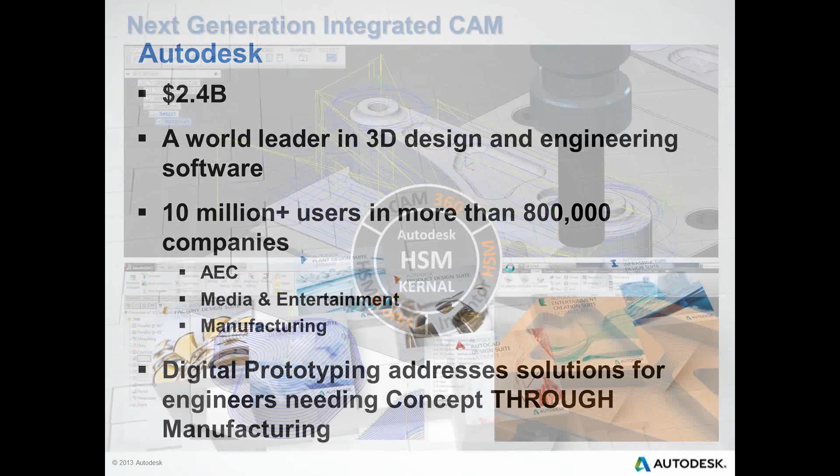So since Autodesk has purchased HSMWorks, they've been able to better HSMWorks and also add 2 more CAM solutions into their portfolio with Inventor HSM and CAM 360, which is the first cloud-based CAD/CAM solution.

So why Integrated CAM? With Integrated CAM, you're able to leverage your existing investment in CAD tools, but also add the ability to add CAM to those CAD tools. And because of this, the typical 8-step machining process, and of course the 16-step machining process where an ECO is involved, is greatly reduced when the CAD data is leveraged.

So by reducing the steps to updating CAD data, regenerating and validating toolpaths, and posting your code, it allows the NC programmer and design engineer to take control of the NC programming process. And many downstream benefits include ETO automation, streamlining of communications, true workgroup collaboration, ECO accuracy, and faster turnaround time.

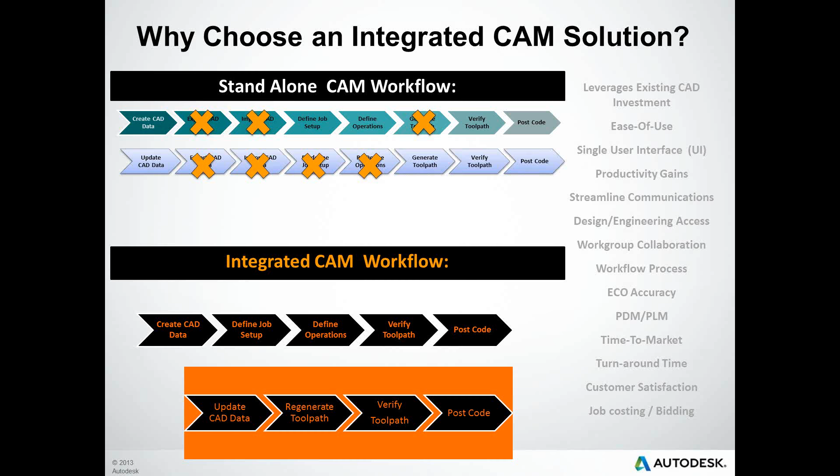And there are a lot of players in the integrated CAM space, and Autodesk focused on just one, HSMWorks. And this is because HSMWorks founders shared an innovative vision that Autodesk has. So when you consider major advancements in the CAM industry, you will find an HSMWorks founder behind them, including the birth of adaptive clearing, which became the basis on which HSM, high-speed machining, was built.

And a lot of first-to-market options, both technological advancements like distributed CAM and the first ever CAD/CAM cloud option, and business benefits such as a free post library, open API, and flexible purchasing options to meet the nuances of each type of company. So with that, there are 3 primary flavors of HSMWorks.

First, you have Express, which is our 2.5 axis milling option. You have Professional, which is Express plus your 3D milling, 3+2 and 4 axis, turning and mill turn, and then our Premium option, which is multi-axis milling.

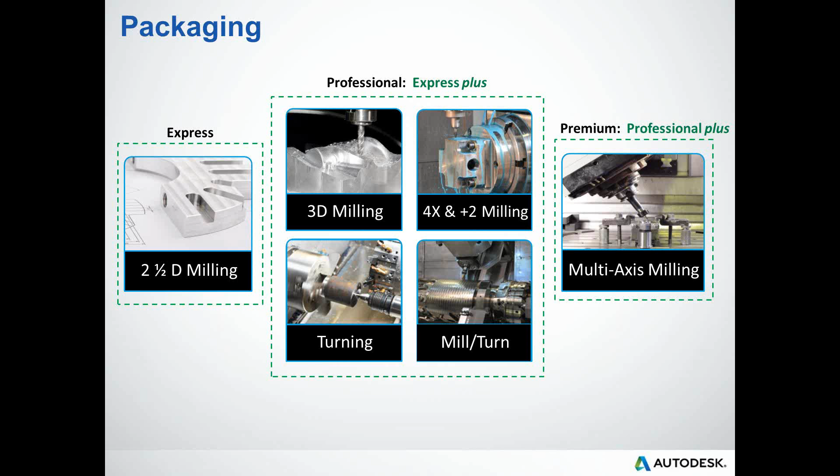So including an open API, access to more than 75 post-processors, adaptive clearing, and tool libraries, the product levels are not modularized. They also allow you to leverage integrated CAM regardless of your budget and machining needs. And in the case of our Express and Professional versions, you will need to have your own seat of SolidWorks. So as you can see, there are lots of features that are included in these options.

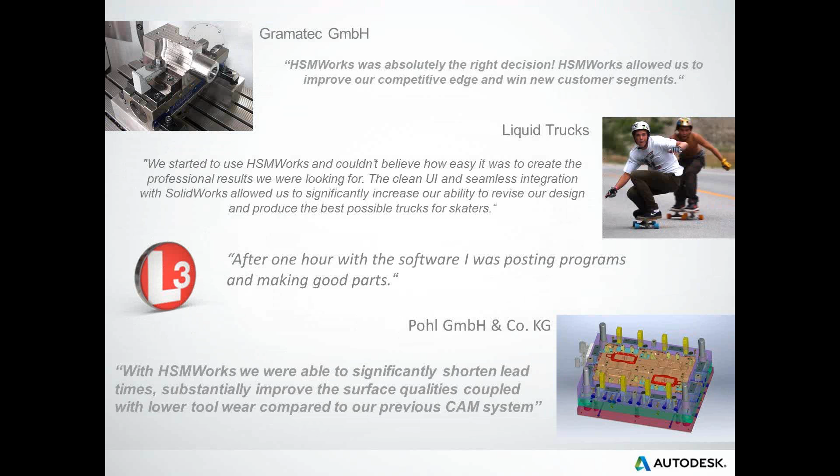So here are a couple examples of companies around the world that have integrated their CAM with HSMWorks. So now with that, let's go ahead and go into our demo side of the presentation. So first off, I want to start off with just showing our 2.5 axis, and just show you how easy it is to get a program done.

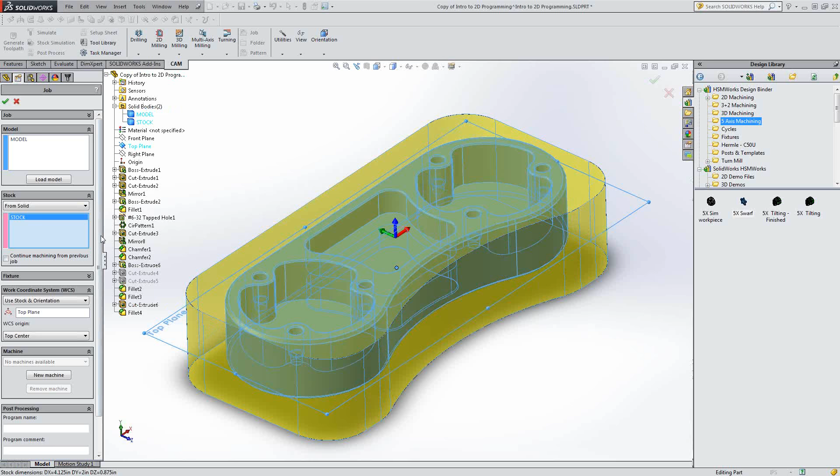So first what I want to do is I'm going to create my job setup. So notice it automatically finds my model. And then here I have the ability to select how I want to define my stock. So we have 5 options. For this one, there's a second solid body in my part that I want to define as my stock. So with that, I can go ahead and OK, and now I can start milling this part.

So first, I'm going to start off with a face toolpath. I go to my tool library, pick my face end mill, and here I have to hit OK. That's all I do, and it finds the part that it needs to mill and knows what it needs to take off, and it defines the toolpath.

So next, I want to go ahead and start roughing out these pockets. So I'm going to go to my 2D adaptive clearing. Again, go into my tool library and pick my 1/4 inch flat end mill. And then here, I'm going to pick the bottom face of my pockets.

And if I wanted to, I can go to my passes tab and tell it how I want to do my stock to leave. I'm going to leave that as it is. And here I'm going to hit OK.

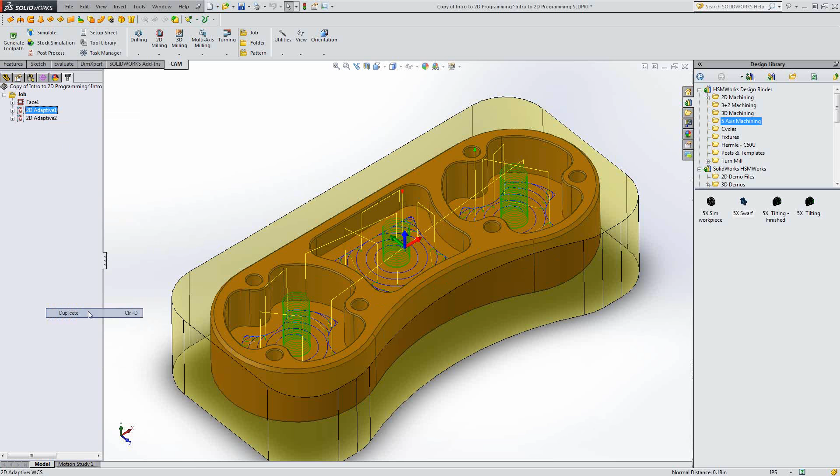So now I've got my pockets roughed out. And now I want to rough out the outside of my part. So I can right-click on my 2D adaptive, and I can click Duplicate. And if I go in and edit this, in my Geometry tab, I can clear the selection from the previous operation. And now I can define my selection for this operation.

Now, one thing I want to note is this checkbox down here for machine cavities. I'm going to turn that off so that it knows it's going to be milling between the stock perimeter and this part, or in this contour. So again, hit OK. And now I've got the outside of my part roughed out.

So now let's say I want to go in and start doing finishing passes on this and on the outside. Again, I can right-click on my 2D adaptive for the pocket, and I can go to create derived operation, and then to 2D milling and 2D pocket. So with this, it's got all the same settings as was done in the first adaptive clearing operation. So here, all I need to do is turn off stock to leave.

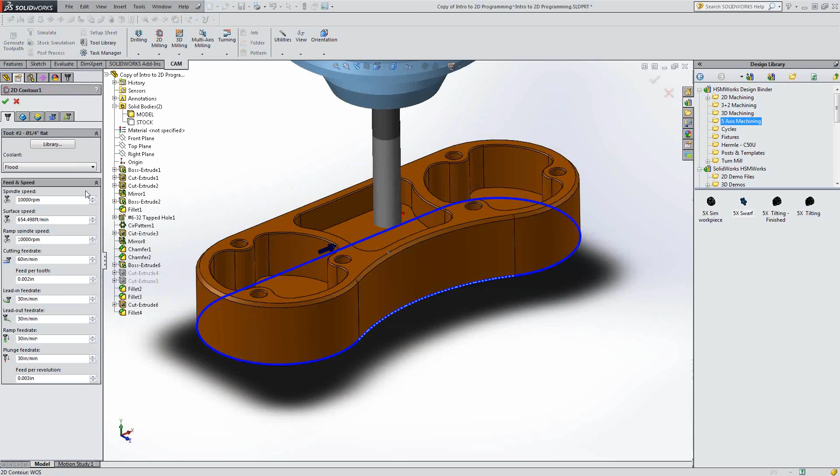And again, I can do the same steps to finishing the outside of my part with 2D contour. And here, the stock to leave needs to be turned off as well. So now we've got roughed and finished pockets and outside of part. So what we want to do next is chamfer the outside and then each of these pockets. So with that, I'm going to do a 2D milling operation, 2D contour.

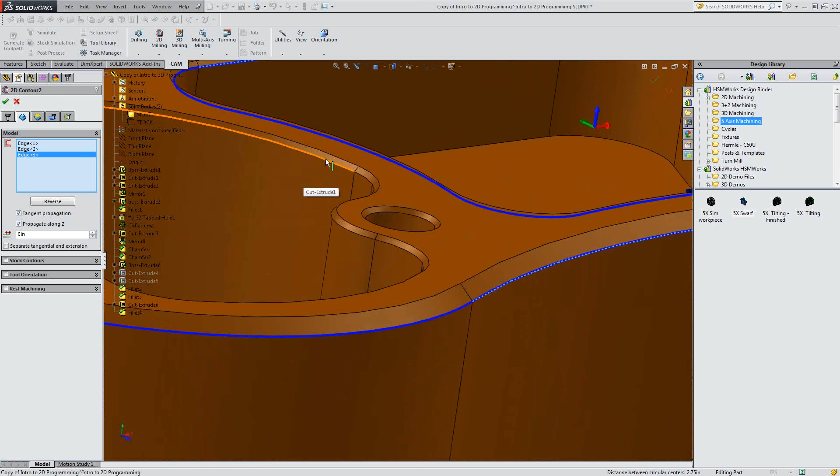Again, I'm going to go into my tool library, and I'm going to pick my chamfer tool. So here I can pick that contour, that contour, there and there. So now, one thing I want to show you is on my passes tab, now that I've picked an actual chamfer bit, you'll notice I have an option here for settings in my chamfer operation.

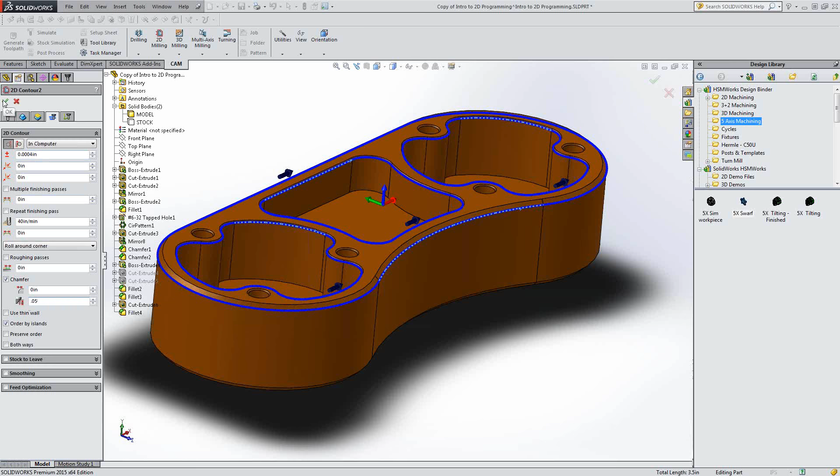So one thing you want to know is with HSMWorks, they built this to where it doesn't clutter your user interface. It only shows the options that you need for the operations and tools that you're using. So here I want to set a 0.05 offset down in the tool bit so that I make sure that the cutting surface is completely touching the part. Okay.

So we've got that, and now I just want to do a simulation, so we can see basically where we're at. So one thing you want to notice in these simulations is not only does it give you toolpath information on XYZ movements, you also get operation information, telling you what operation it is and the tool I'm using. And then it's also giving you machining time.

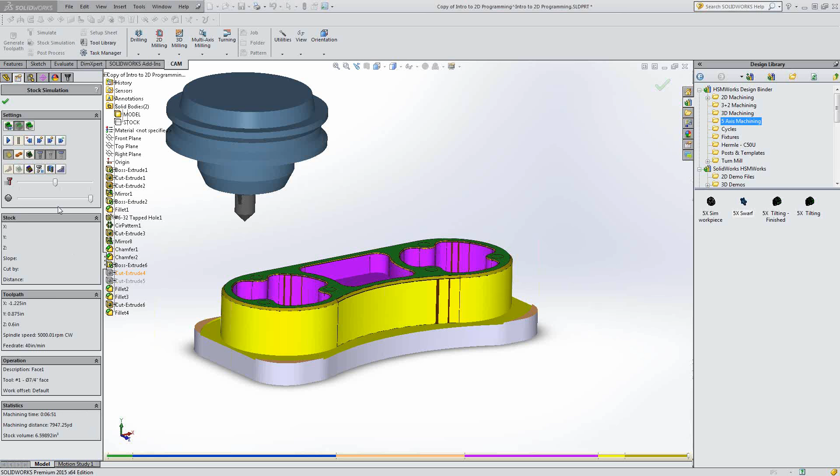So we know that we've got the part roughed, and the last thing we've got to do is our holes. And here we need to do a pre-drill with our tap. So the first thing I'm going to do is go to my drilling operation, and I want to do a spot drill. So I've got my chamfer bit selected already from the last operation. I'm going to keep my chamfer.

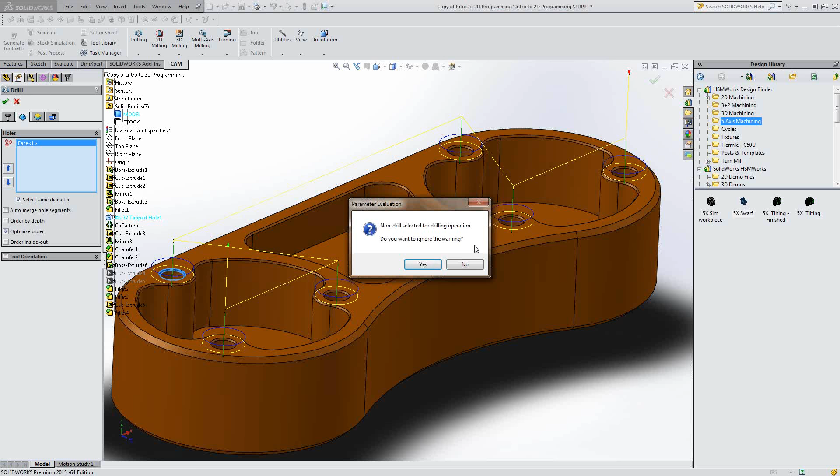And all I need to do is click on the conical face, and then come over to my browser and select same diameter. So you notice now that it's found all those holes, so I didn't have to go and select them all. And then it's giving me a warning saying that a non-drill bit has been selected for a drilling operation, but we all know you can use a chamfer bit for a spot drill. So we're just going to go ahead and say yes and ignore that.

So now I'm going to go back in, and I'm going to do my drill. I'm going to tilt it down to where I can see the smaller diameter. Again, here I want to select same diameter and auto merge. And the auto merge basically tells it, hey, there's more geometry above, so you need to make sure you compensate for that. So now I've got that. And then lastly, I'm going to do my tap.

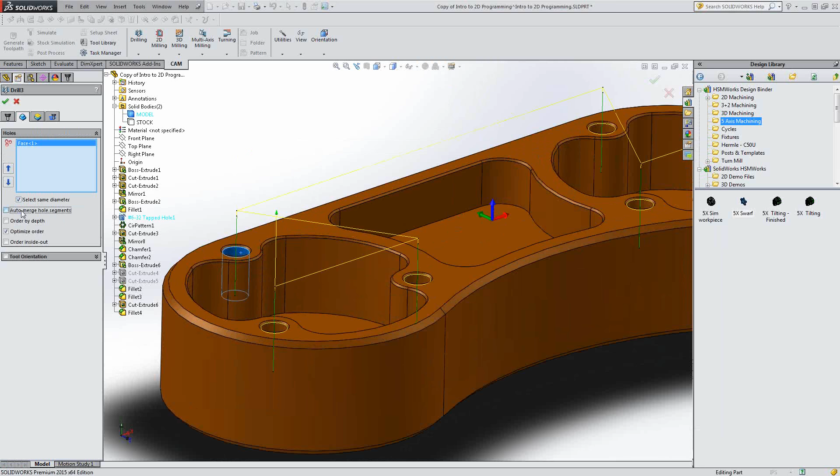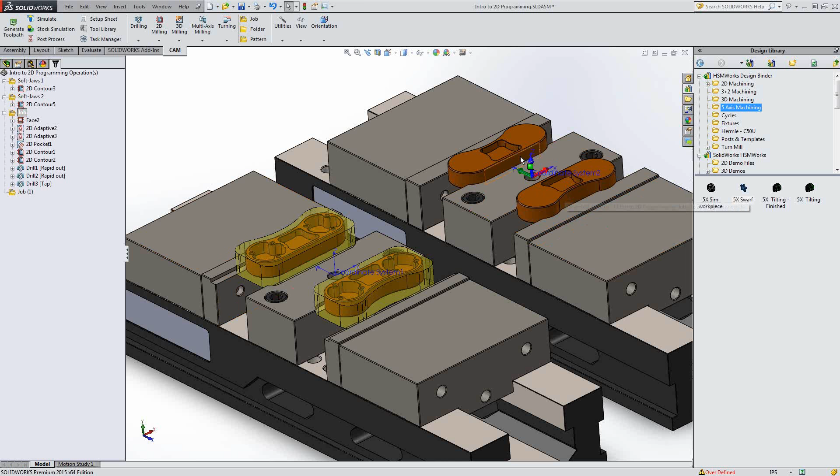Again, I select same diameter and auto merge just to make sure. Okay, so with that, we've got a programmed 2.5 axis part. Now, let's say this isn't just an individual part, you're doing this in assembly. Okay, so I've got two fixtures, two of these parts, and then the same part flipped over so that you can mill the bottom.

So I've got this first part already programmed. Now one thing I want to do is I need to recreate all these toolpaths over on this part. But I don't want to go and just have to redo everything. So I'm going to select all my toolpaths, and I'm going to say make pattern. Now one of the great things that I like about HSMWorks is if you have multiple parts of the same part, we have component pattern.

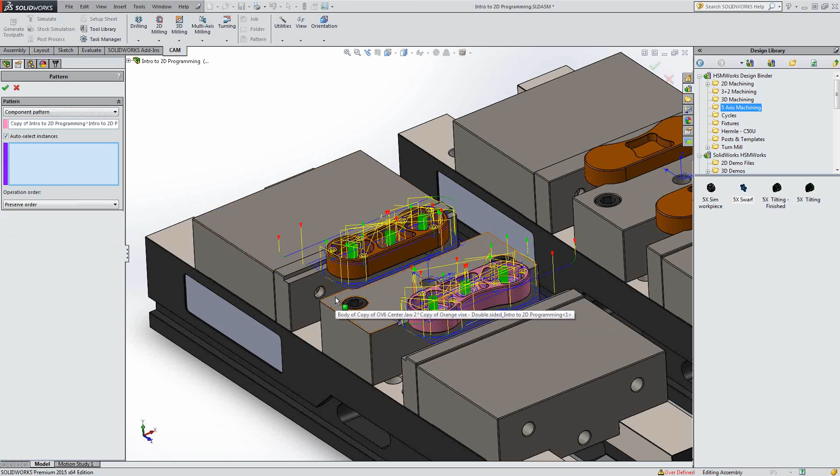So all I have to do is pick my components, and it automatically finds the part. And then it doesn't matter where that thing is. I can do a drag and create multiple copies. Anyway, and it'll find that part no matter where you put it.

So now let's say I've got my job set up for this part, and I want to use some of these toolpaths that are on this job setup above. So let's take this face operation first. I can right-click on it, and I want to copy it, and I want to paste it into this folder for this setup over here. So now all I have to do is hit Generate Toolpath, and it'll automatically find and set it on that new geometry.

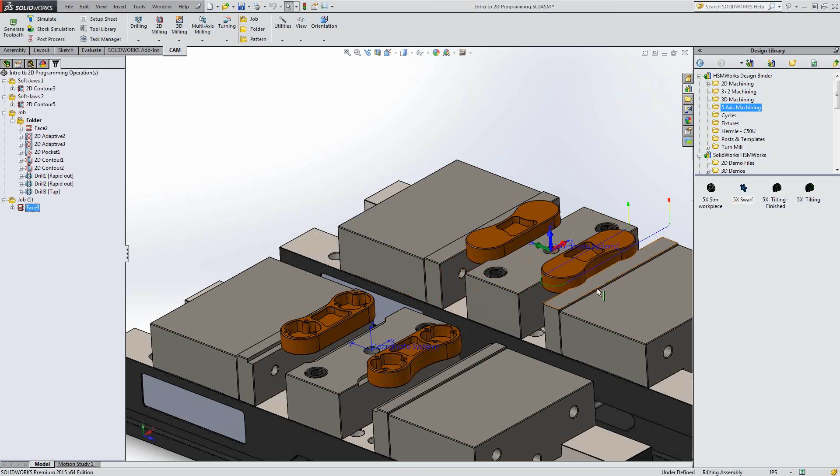But now, I've got this 2D adaptive operation for these pockets. I want to use the same operation with tools, settings, everything, and I don't want to have to go recreate it or copy and paste. One of the things that is awesome in HSMWorks, I can click a face, and I just drag and drop. If I had the right folder set up. Let's try that again. Drag and drop. And there you go. And so I can do the same thing with the pocket operation.

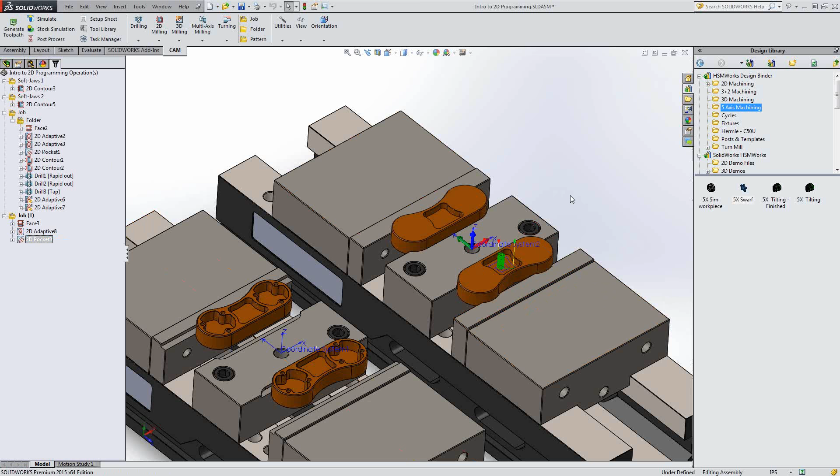So there's some pretty awesome ways of copying and pasting toolpaths and patterning components. So next, I want to go ahead and go into our 3-axis part of the demonstration. So before in our 2.5 axis, we had to define some of the geometry and where it was going to lay at. But in our 3-axis, we don't have to do that.

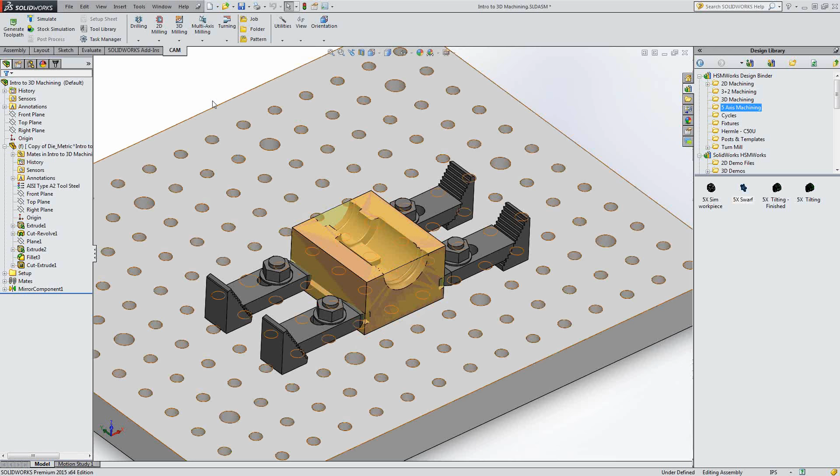So what I want to do is I'm going to come in, create my setup again. This time on my stock, I'm just going to say relative, and I don't want to have any additional stock. Okay, and then I'm just going to click OK on that. So I've already got my setup. So in my 3D milling tab, I want to go down to adaptive clearing. And my first operation, I'm going to do a 3/8" bull nose end mill to just rough out some of the material.

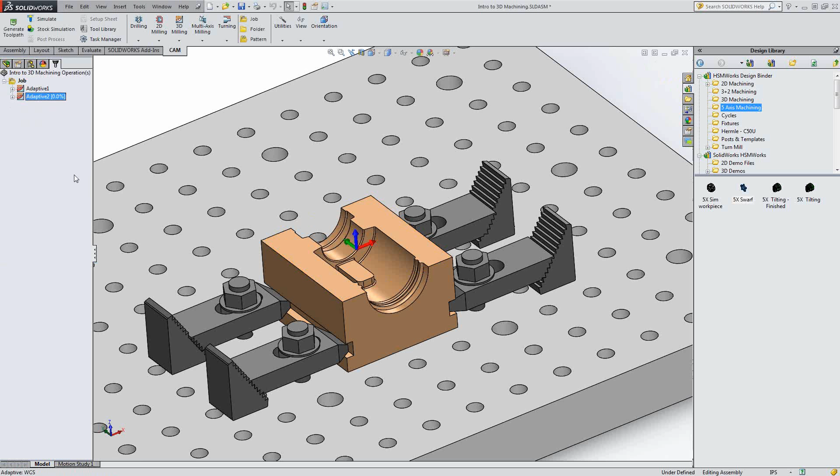So with that, I'm just going to click OK and let it go. So while that's going, I'm going to go ahead and start my other adaptive, and this will be another roughing step down from that one. So I'm going to go on my 3/16 bull nose, and in my geometry tab, I want to change my rest machining option to from previous operation so that it recognizes what's been removed in that initial adaptive that we did. And so notice while I created this adaptive operation, my first one finished doing its calculation.

So while that one's going, I'm going to finish off the top of this little flat face right down here. So I'm going to do my horizontal operation. I'm going to keep the same tool. And then I want to go ahead and OK and see what I get. So while I was doing the horizontal, again, my second adaptive clearing finished.

So with this horizontal now, it found not only the face at the bottom where I'm wanting to go, but it also found these two faces at the top, which obviously I don't want because it's already finished. So let's go ahead and hit edit. I'll go into my height tab, and I'm going to change my top height to be just below that so it doesn't recognize it. And so now that's finished. So we've got this roughed out. This face is finished. Let's go ahead and simulate this a little bit and see what we get.

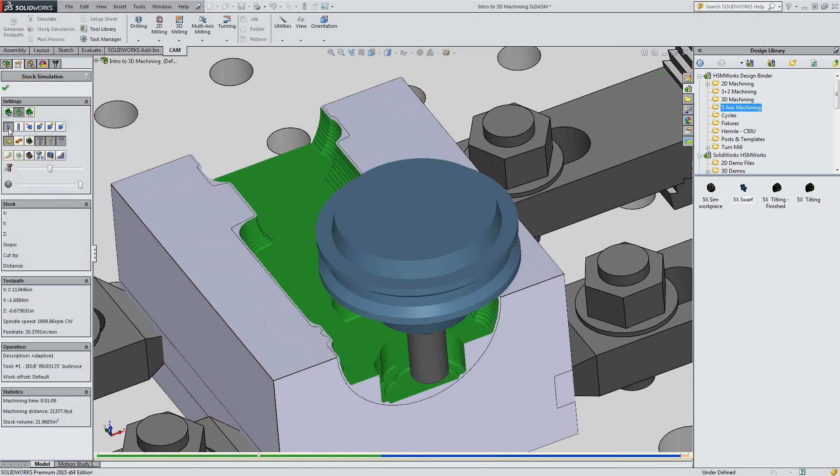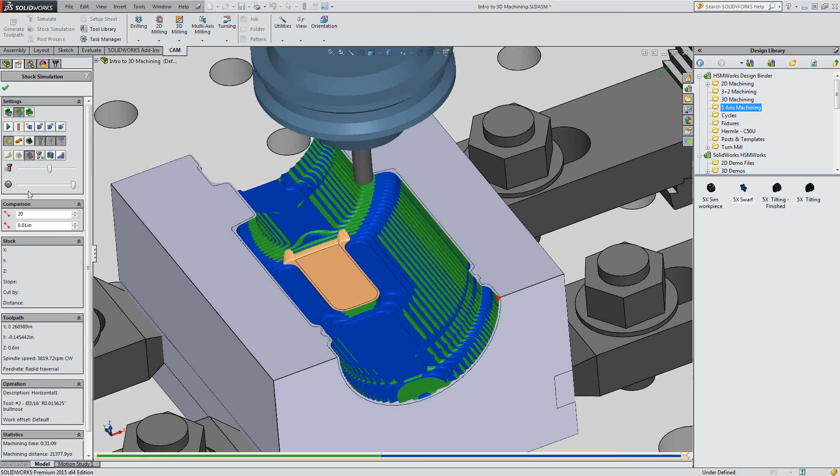So again, down here you can see in the statistics, it's estimating my machining time to be 31 minutes. All right. Now, another great feature to show in the simulation is comparing stock to the model. So you can see we've got quite a bit of material that we still need to remove to be able to have a finished part. So let's go ahead and start doing that.

So in my 3D milling, I'm going to go into my parallel command. And for this one, I'm going to go down to a 1/4" ball nose end mill. Now, if I go into my geometry tab, here I want to do a slope containment of my toolpath. So I want to do 0 to 35 degrees. And then I'm going to go ahead and hit OK on that.

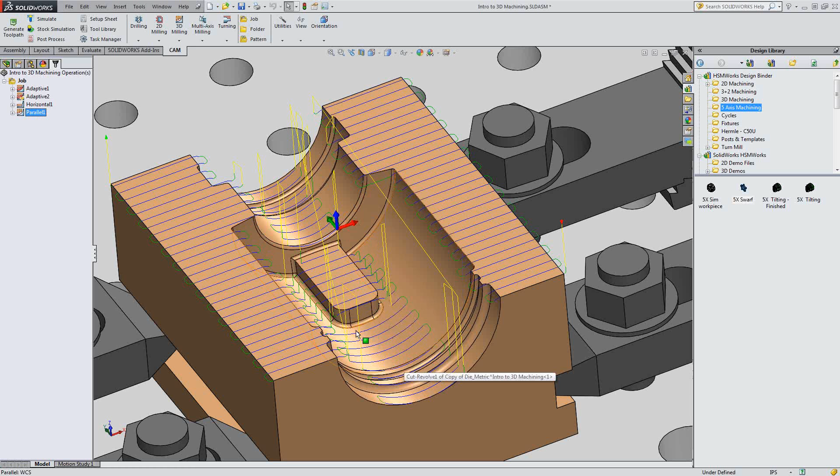Okay, so now notice, again, it got the top face on both sides and the top face of this. And I really want to refine my step over, and I want to change my path direction. So let's go ahead and go back in here. So again, in my geometry tab, I want to make it to where it avoids these two top surfaces and then this surface as well. So I'm going to turn on my check surfaces, and I'm going to select those three faces.

Now, for the step overs, I'm going to go into my passes tab. I'm going to change this to 0.02. And then for my pass angle, I'm going to go to a 45-degree angle. So now you'll notice I've got a really fine step over now. It's angled at 45, and it's contained in that 0 to 35-degree angle. So now let's go ahead and get the rest of it up.

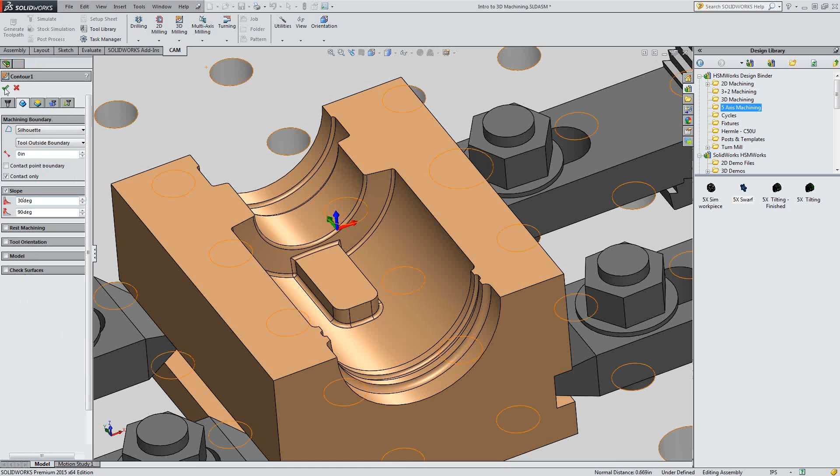For that, I'm going to do a contour. And on my slope, I'm going to make a 30-degree slope to 90 degrees because I want to have that 5-degree overlap to make sure that I get all the material. And then I'm just going to go ahead and hit OK. Alright, so now you'll notice not only did it get the inside, but it also got the outside. And we don't want that.

So let's go back into that. And on my machine boundary, change tool outside to tool center. And go ahead and hit OK. So now it looks like the toolpath that I want for that. So let's go ahead and simulate this again on the stock simulate. And I'm going to go ahead and speed it up so we can get that comparison window to see what we've got left.

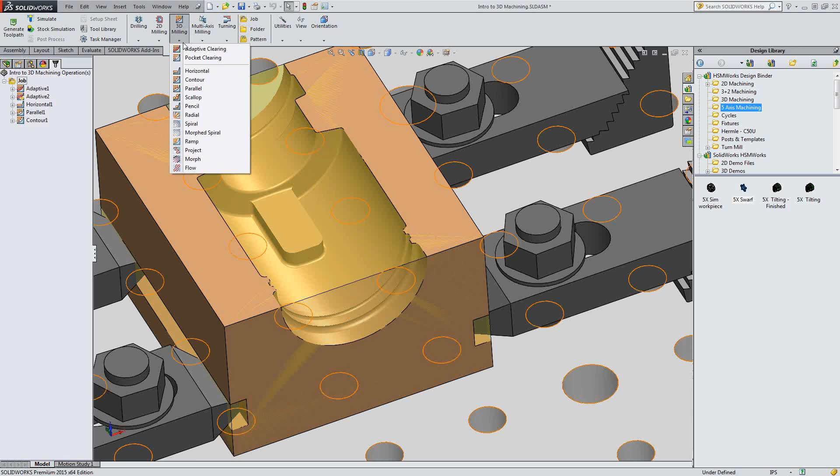Alright, so simulation's done. Now let's go ahead and turn on compare. So now you'll notice what I've got left is material in these radiuses. And that's about it. So let's go ahead and do one more toolpath and see if we can finish that off. So in my 3D milling panel, I'm going to go down to pencil toolpath. Now for this one, I'm going to do a 1/16" ball nose end mill. And I'm going to click OK.

Alright, so you'll notice it got these smaller radiuses and then this radius down here, but it didn't pick up these larger radiuses. So let's go back into the toolpath. And over in my passes tab, I'm going to change my overlap thickness to 0.125 so it'll find the larger radiuses. I'm going to change my step over number to 4 so that I can limit the number of step overs it takes. And then I'm going to do 0.02. I'm going to click OK.

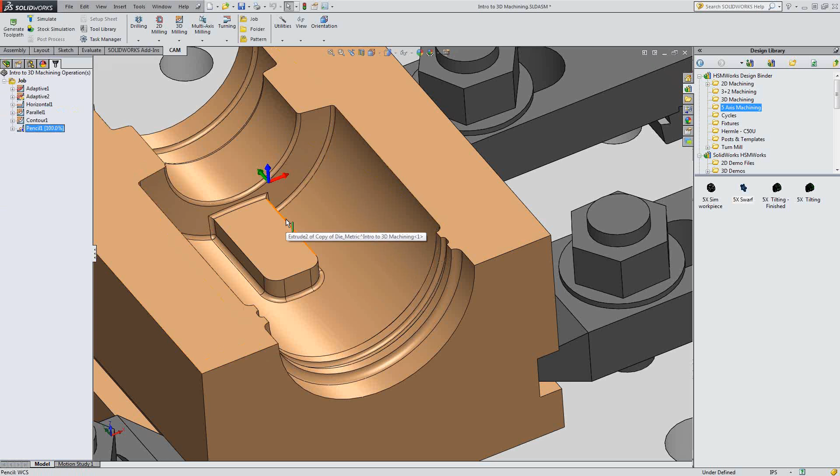And now you'll notice it picked up all these larger radiuses. And now, if we do a stock simulation, you'll notice that each toolpath is also color-coded as well, which corresponds to the bar at the bottom showing you where each step is.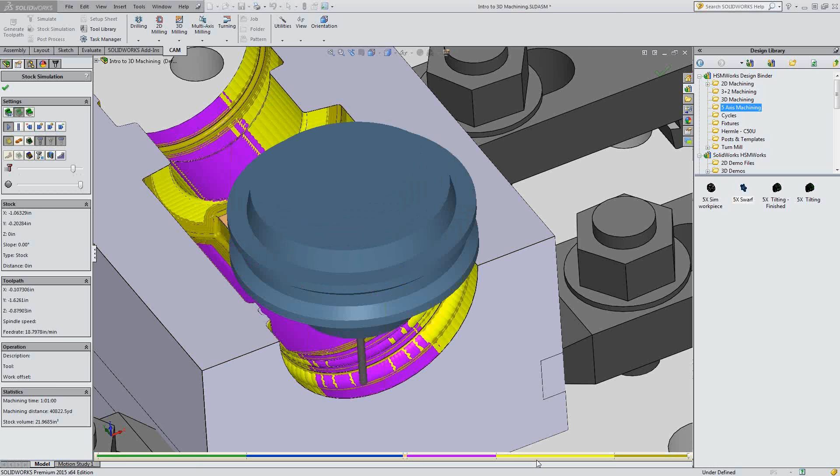Alright, so now we can do a comparison between the model and the stock. It looks like we have a good, complete part. So that's 3-axis. Next, I want to go into a little bit of 3+2 just to kind of show you what exactly you can do.

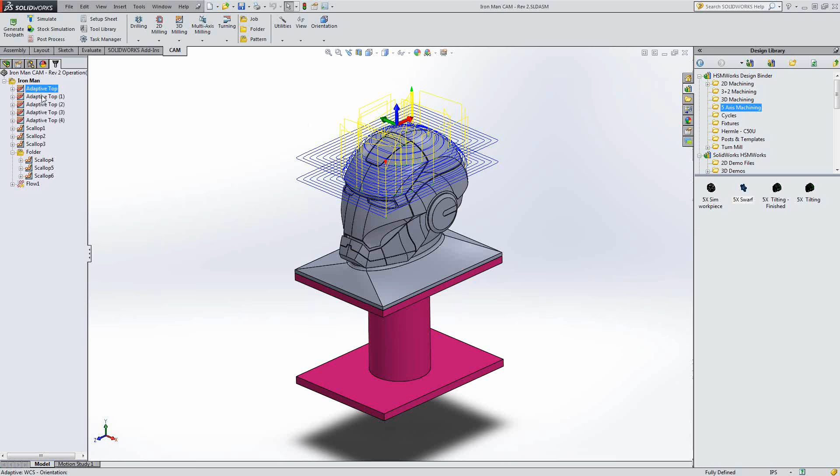So you'll notice that all these toolpaths, this whole part was programmed with my 3D milling toolpath. So let's show this one. So one thing you can do is you define your tool orientation. And then here I defined how far down I wanted that tool to go so that I knew that my tool would be able to go down without any collision between the shaft of the tool or the holder on the part.

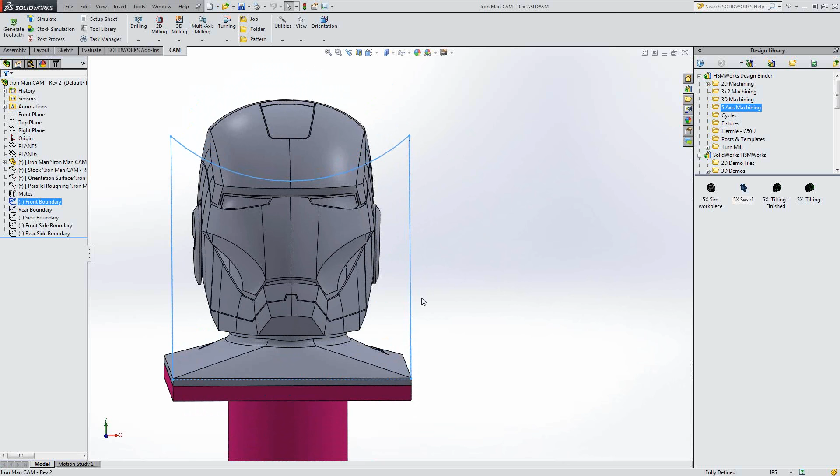And then also, a lot of these were done with, let's do this one, with creating a sketch. So by creating a sketch, I'm defining the boundary in which I want my tool to go so that it stays within that boundary at the plane depth that I set in my toolpath. So this is a good, easy way to be able to machine parts that you think would be a simultaneous 5-axis on a 3+2 and be able to have a complete finished part that looks really good.

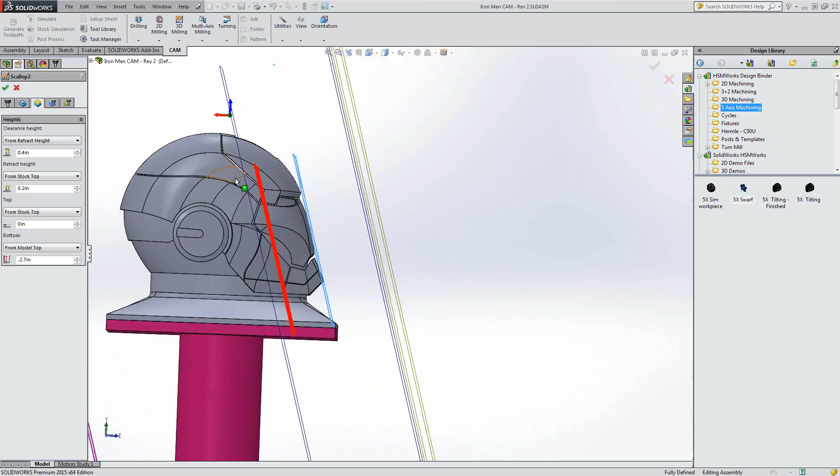So here's an example of where I use that sketch boundary and then modify depth in which I wanted my tool to go. And then that flow was just being able to finish that part. So I want to do a simulation of this real quick so you can kind of see the tool in motion and how it changes the orientation.

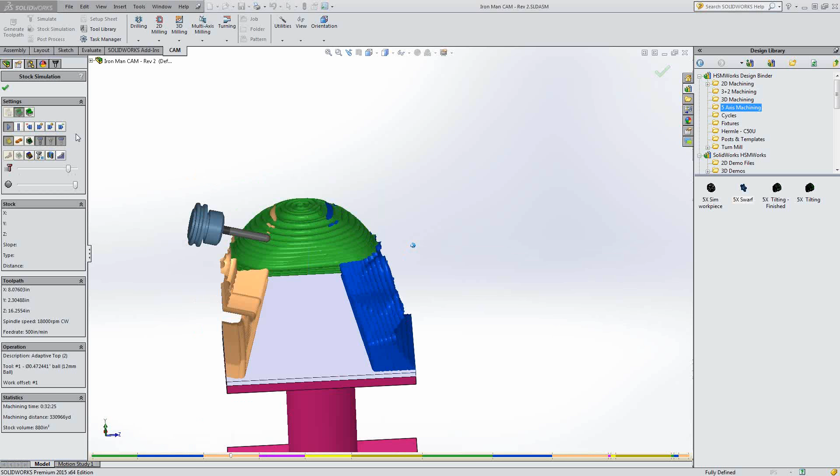So there I have, that's my first pass with the adaptive. Here's the second pass on the adaptive. Basically, I'm just roughing out the part. So now it's going to start going into the scallops and doing finishing passes. In a second, right here.

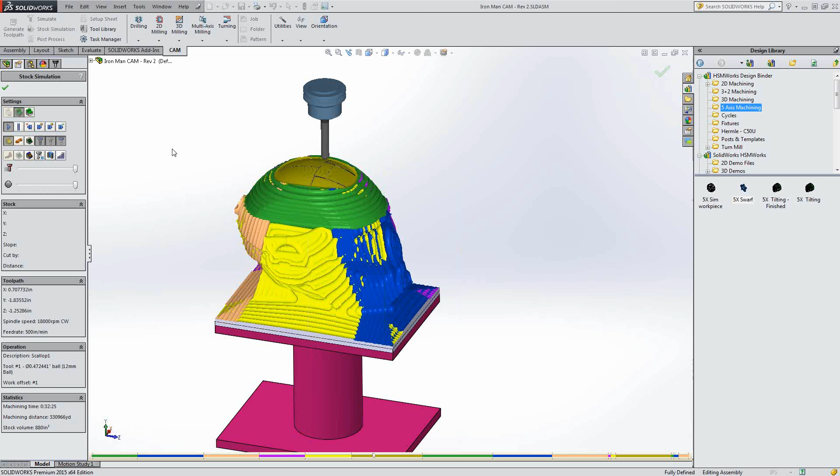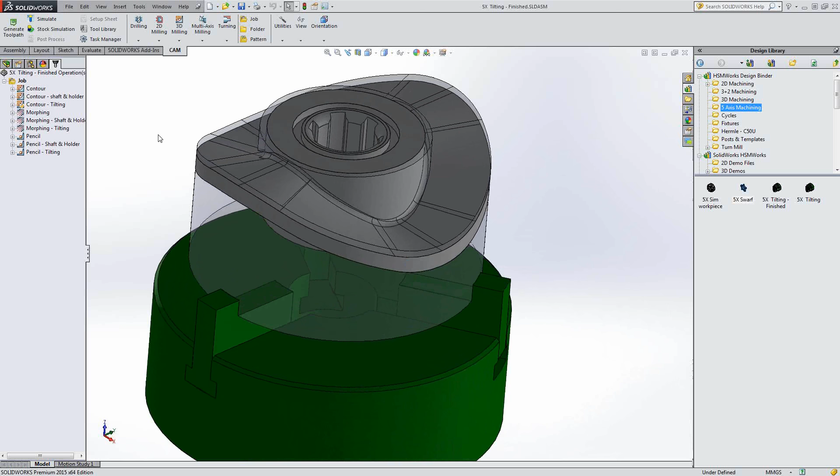So that's an example of how you can do 3+2 milling where a 5-axis simultaneous doesn't need to be completely used. Now I want to show, whenever you get into the 5-axis, the way HSMWorks has done it, they've added basically multi-axis tilting capabilities in the 3-axis tool options. So this would be a normal contour that we would do. You select the face of the geometry that you wanted to go around, and then that would be it.

But if I go in and simulate this in my stock, you'll notice over here that I'm getting clashes with the holder and the shaft. So to get by that, I can do what's in HSMWorks a shaft and holder detection, basically. And so with that, we've got multiple different options for how the toolpath would react whenever it detects a collision. So as you can see, I can either do a trimmed option, a pull away, detect tool length, or just fail the toolpath completely on collision.

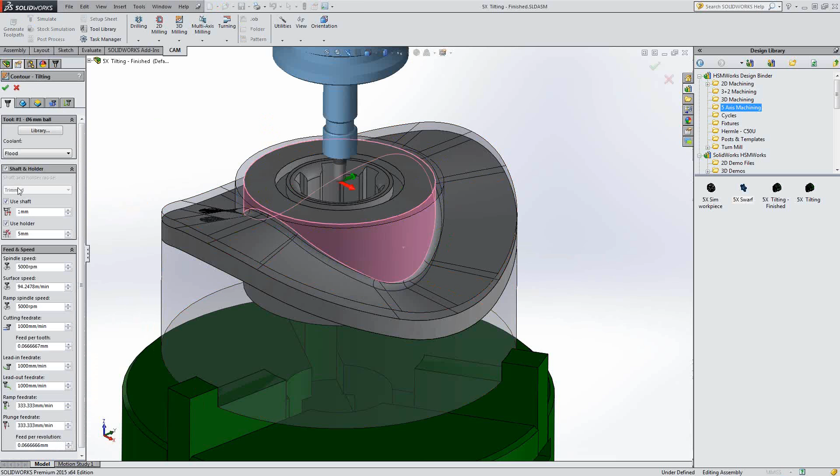So in this one, we did trim. And so what you'll see is that it literally stops the toolpath at the point that it detects that there's going to be a collision. But where does that leave me on machining the rest of my part? So what we can do is, I'm still having my shaft and holder detection, but if I go into my passes tab, I have the option to turn on multi-axis tilting. So I've got that turned on. I've got it set to an overall of 90 degrees to be able to move in, and 5 degrees front and back.

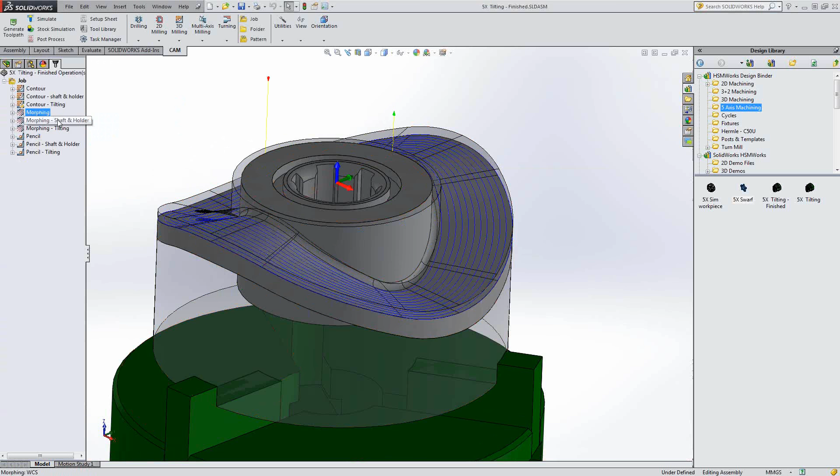So if I go ahead and simulate this, you'll notice as it goes around, it's tilting to make sure that the shaft and the holder stay away from the actual stock of the part. So again, here I can do that on this machining off this face. You know, this would be the option without the shaft and holder.

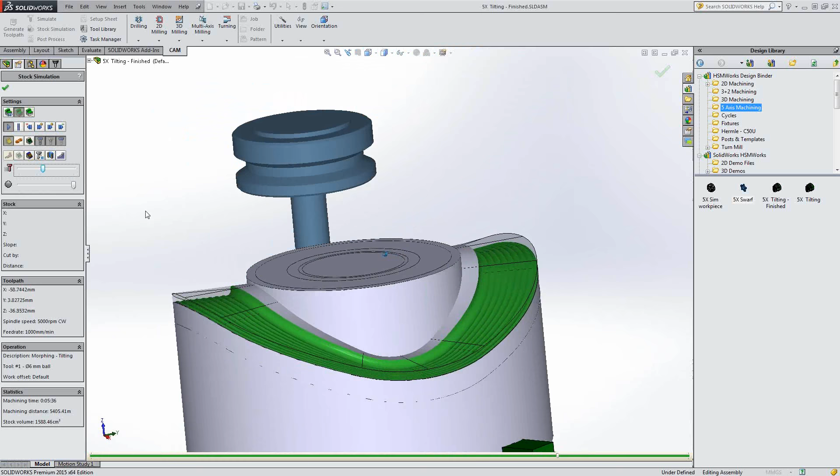So this would be with trimmed turned on. So it's pulling up, retracting to miss this part of this material, and then retracting over on this other side as well. And then here again, I've got my multi-axis tilting turned on. Again, in the passes tab. And so here I'm able to see that once it gets to that point, it will tilt. It will tilt if I have the right option turned on.

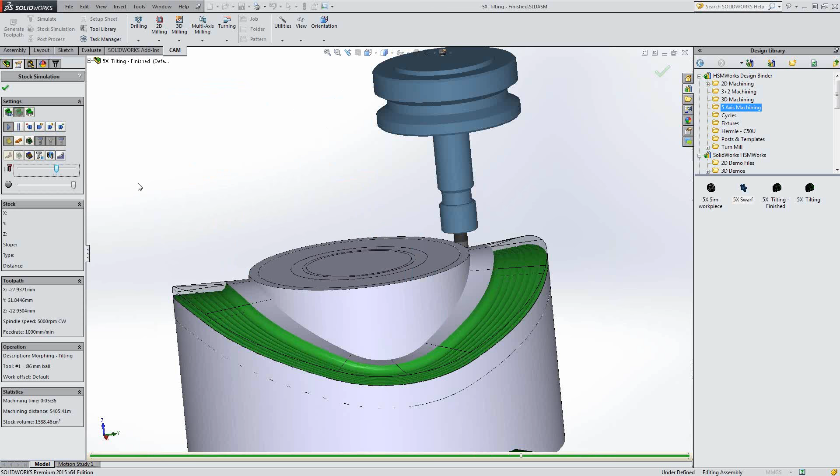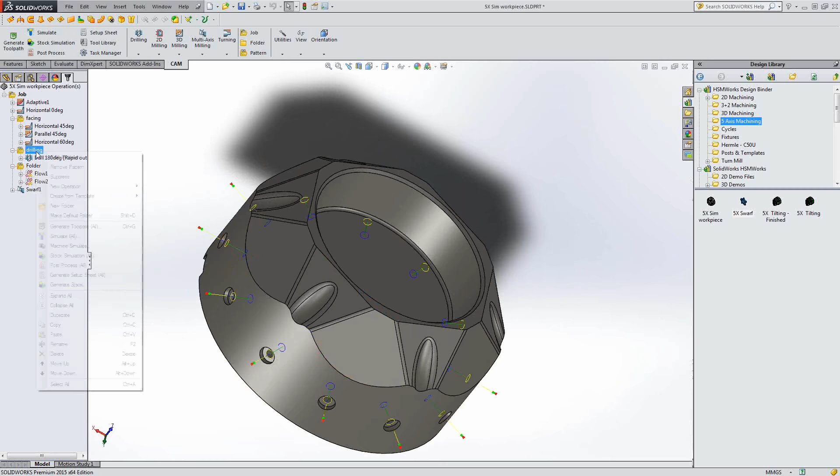Okay. And then the same can be done on the pencil operation. So with that, let's show a little bit of how you can do a simultaneous 5-axis operation. So again, this part is mostly programmed with our 3D milling options with the drill. And you'll notice that these are also circular patterns. So if I go in and edit this pattern, I've created the one operation where I've oriented the tool, which is this initial drilling operation. And then I've selected the circular pattern, picked the face, and then told it how many instances I want.

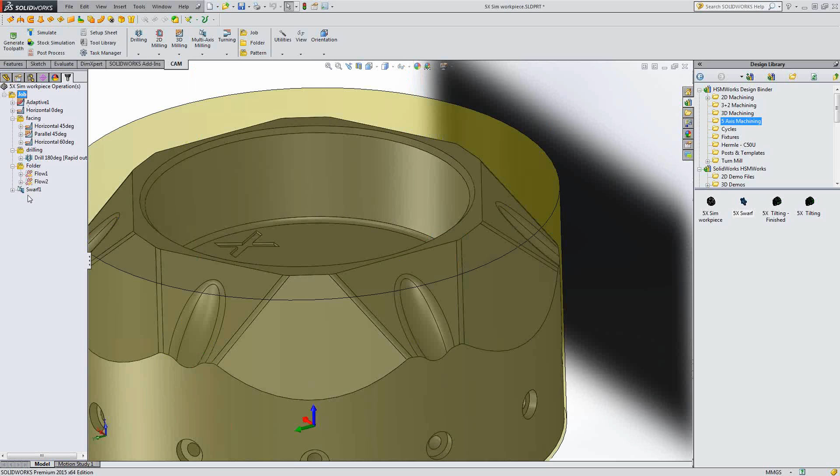So down here I've done the same thing. I've got this flow operation set up to finish off this contour, and then I've got the second flow operation to do a finishing pass on this contour. And then my swarf, which is a multi-axis milling option right here, is doing this angled contour right here. So then let's do a stock simulation on this.

One of the things I want to mention is that in your tool library, whenever you create tools or use other tools, you have the option to either have a tool holder on there - you'll notice the first tool didn't have a holder - or you can select one, or create your own when building your library. There are multiple ways to create tools: through the standard dialog boxes, or you can model your own and insert it as a form tool, which is handy when you have custom tooling.

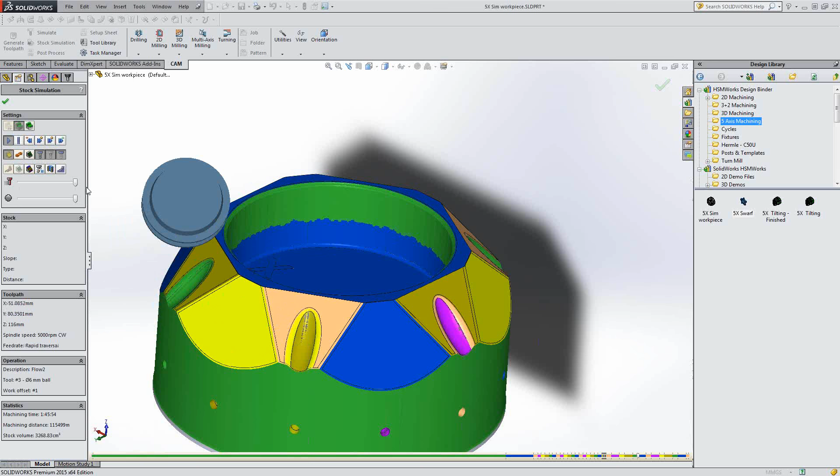And there again, you can do the same thing with the holders. You can use their standard ones and then basically copy the design and modify the geometry per what you need for your holders in your company.

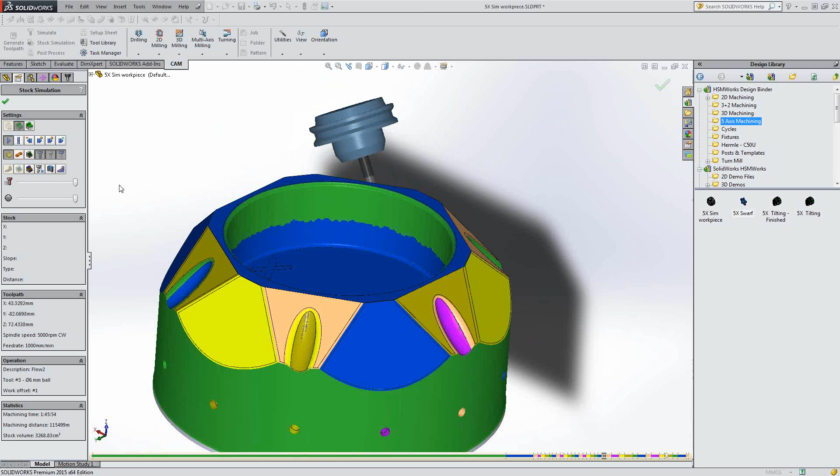Alright, almost done. So that's the 5-axis simultaneous show.

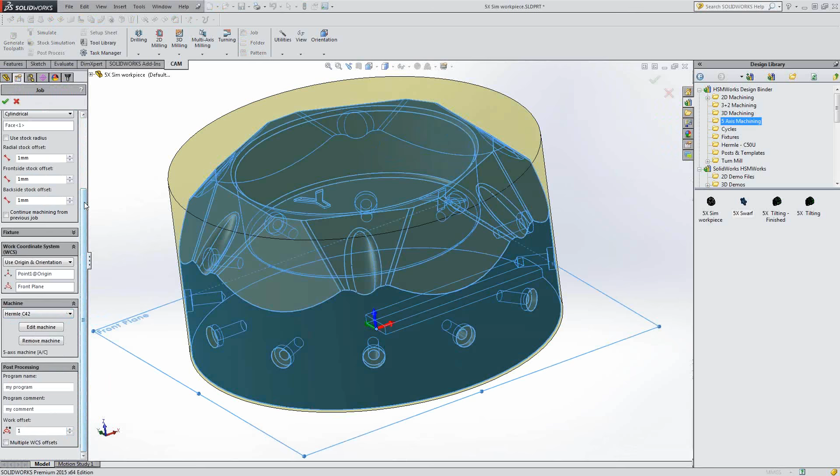One other thing you can do in here is machine simulations. So let's just say I want to go ahead and simulate that on a machine. I right-click on my job and go down to Machine Simulate.

Let's say I just want to hide some of the housing so I can make sure I've got everything right, so I can see how it's actually running. I'm going to go back in my CAM tab, simulate. Alright, let's go ahead and watch this.

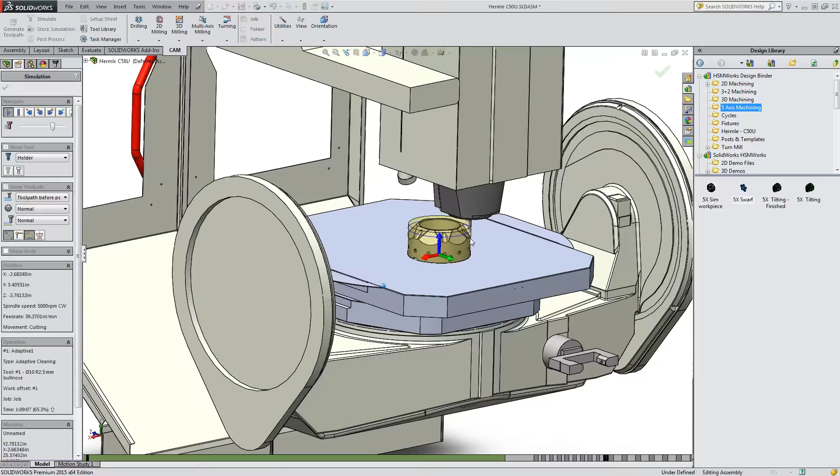It's pretty nice to be able to do machine simulations and watch the actual operation. Here you can actually see whether you're going to have some kind of collision in your toolpath. Plus it's just kind of fun to watch.

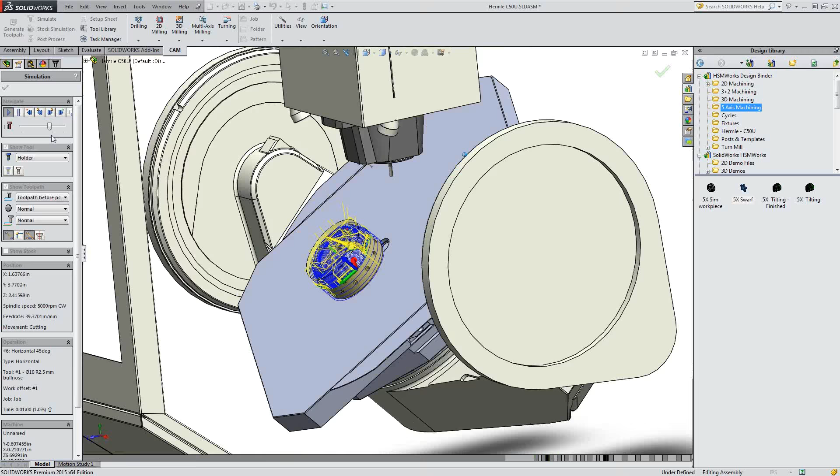Want to get into the tilting. Okay.

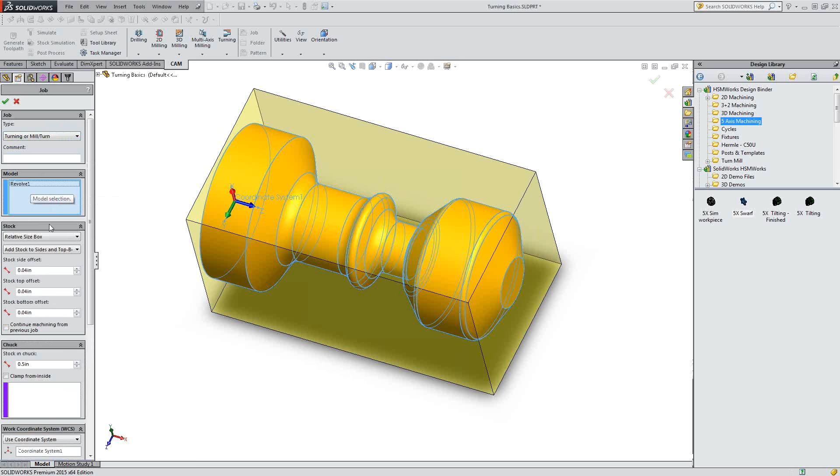Now I'm going to go ahead and go to the mill turn and turning aspect of it so you guys can see the basics of how it works in here. So I've got my part. Again, I'm going to create a job setup. Now the one difference between milling and the mill turn option is that I actually have to define a different job type. So again, my model's been selected.

I'm going to go to a cylindrical stock, and then I'm going to just pick a face so that it knows that's where it's going to be centered at. Now you'll notice it kind of has dashed lines representing the chuck. You can define and model your own chucks and then select it here. I know a lot of people do that as well.

So I'm just going to set up some of what my stock option is going to be. Change to 0.3. I'm going to do 0.1 on the front end, 0.1 regularly. Okay, I'm going to go ahead and click OK.

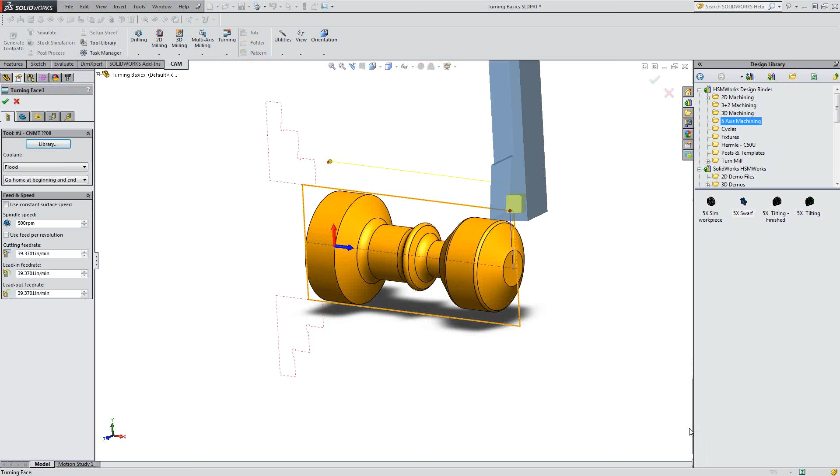Now, to start this, I'm going to do a turn-facing operation. Go into my tool library. I'm going to use this diamond tool. Then I'm going to go ahead and click OK.

Now you'll notice that the tool goes home before it goes into the part. Now you can change that right here on the front. I'm going to say don't go home. And then it's right there.

So next I'm going to go ahead and rough down the profile and use the same tool. And here I just want to go ahead and click OK, see what I get.

Alright, so you'll notice that with that operation, it's gone down at an angle. But say I didn't want to do that - I wanted to save that for whenever I do my profile grooving, and I just wanted it to come straight across. I can go into my toolpath, and in my Paths tab, I can turn off Allow Grooving.

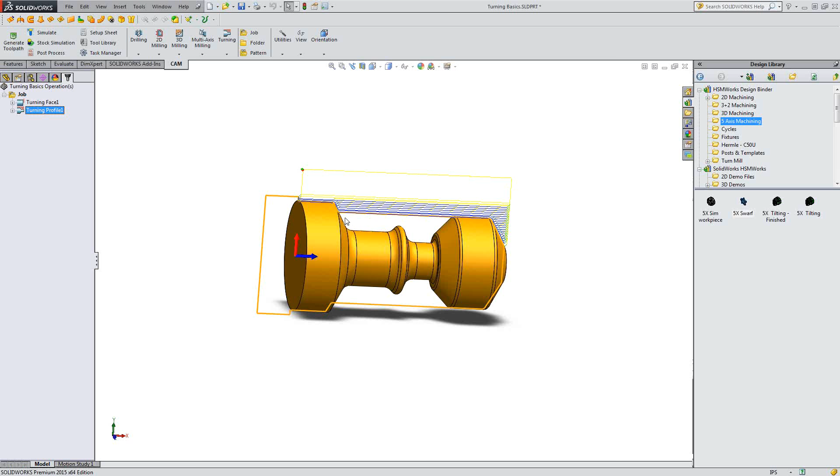So now you get a straight shot across, and then whenever I go in to do my profile grooving, the stock is straight across instead of being at a different level. But I want to go ahead and turn that back on in this case.

So now if I go in and do a turning profile groove, I'm going to select a different tool. You'll notice that it's already recognized that my previous operation has got it down to this, and I've already got finished over here.

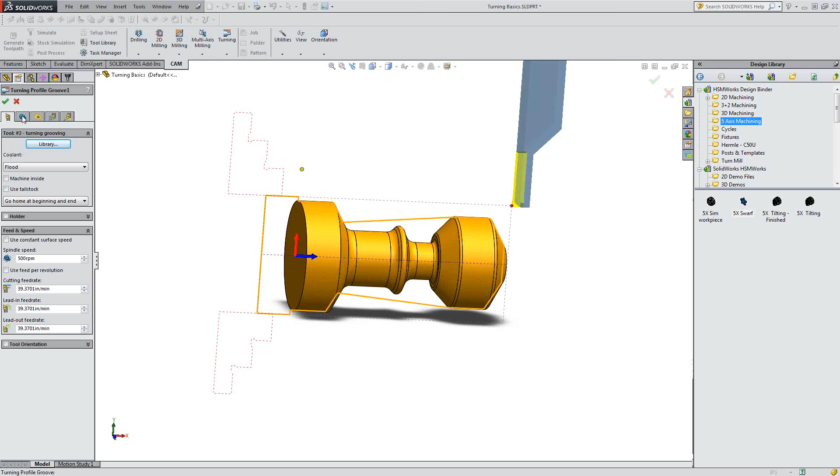So I basically want to contain my toolpath between here and here. To do that, I go to my Geometry tab and turn on Confinement. All I have to do is pick my two edges that I want to confine it within, and now this containment box is reduced down to that spot I want. With that, I'll click OK.

And now I've got a rough and finished edge. As you'll notice in my Paths tab, I've got Finishing Paths turned on. So we'll go ahead and simulate this and see what we get.

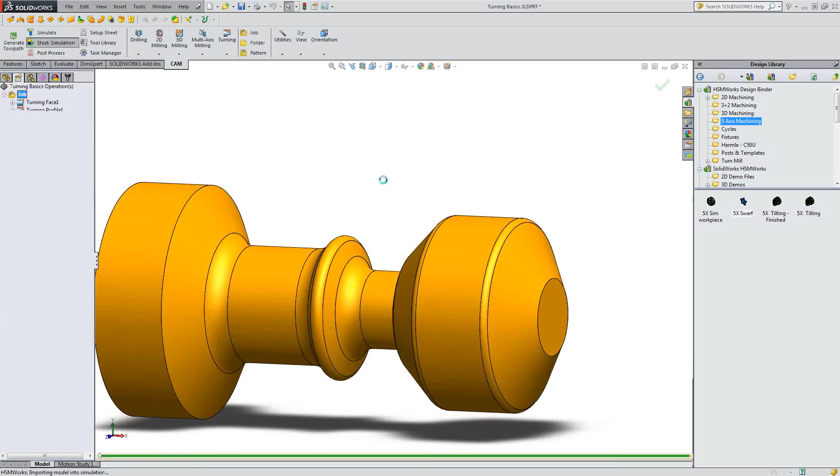Okay, so you can see that I've got a good finished part. Now I just need to part it off. So here I'm going to do a turning part, and you'll notice it's already recognized where it needs to go, so all I have to do is click OK. And that is that for that part.

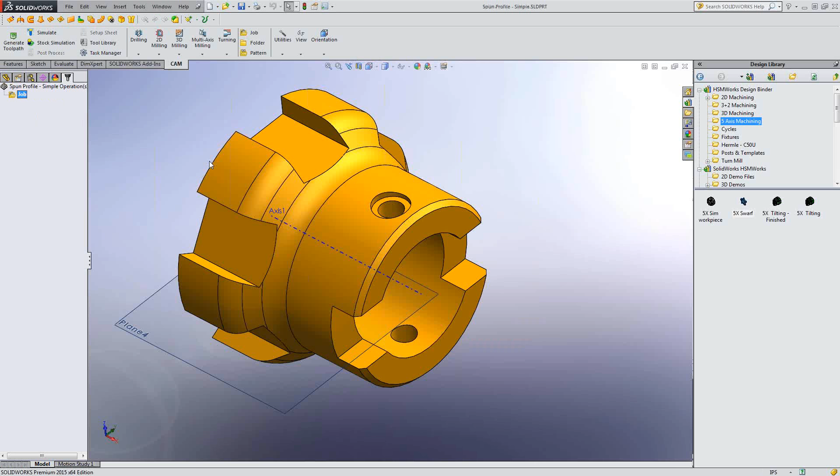Now I want to show the option of doing mill turn. Again, your setup's the same. I've defined my job type as turning or mill turn. My model has been picked, and then I've selected cylindrical stock.

Now, in this one, what I've done is, if I go in and do a turning profile, you'll notice that the geometry it selects isn't the entire part. So what I have to do is, in my Geometry tab, select an actual model that would encompass the whole part cylindrically.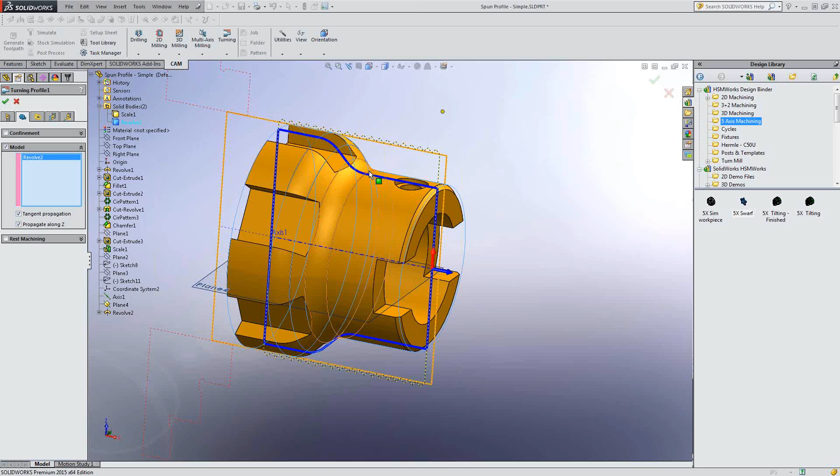So I've created a second solid body that doesn't have any cutouts that will represent the part that needs to be turned to. You'll notice that the boundary of what was going to be turned has already updated for my new geometry. So I'm going to go ahead and click OK.

Obviously I have to pick a tool. Now I can click OK, and I've got that rough and finished.

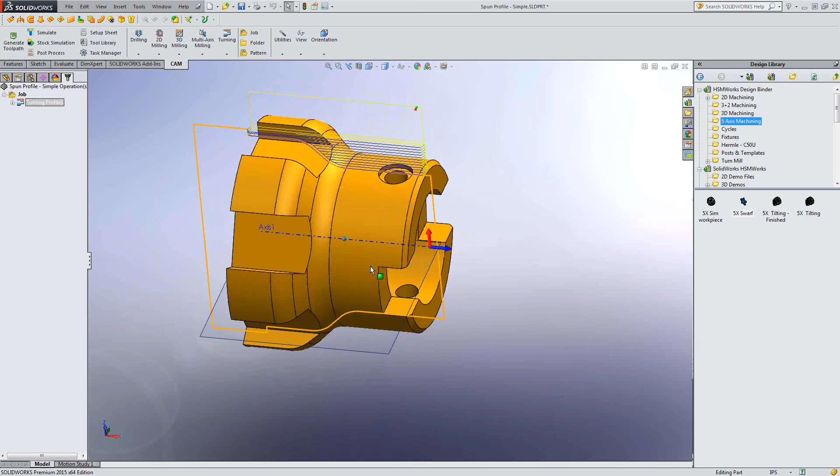And then what I want to do now is, let's say I want to go in and mill out these little slots. So I'm going to pick 3D milling, 3D adaptive, and take my 1/4 inch flat tool from my tool library. I want to select that face as my stock contour, and also pick it as my machining boundary. Then I want to come down to the bottom here and set my tool orientation to that face.

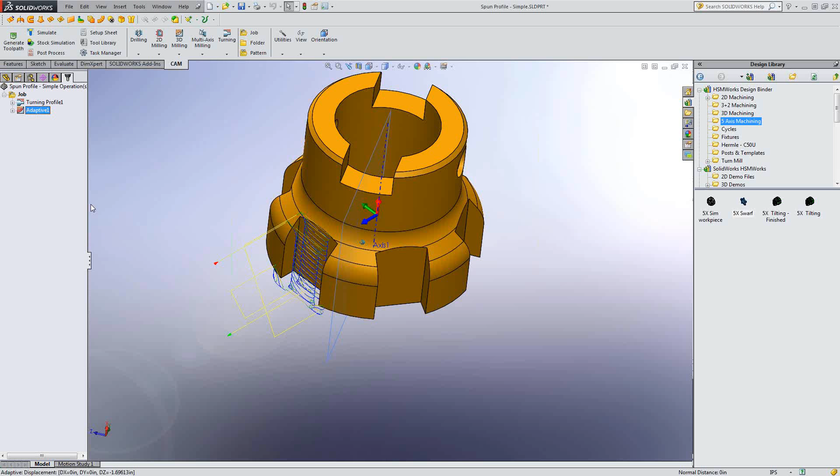On my rest machining, I'm going to change from job stock to previous operation. I'll go ahead and click OK on that, and now you'll see that I've got a milled out portion of that part.

So now I want to go ahead and do a circular pattern of that operation to get the rest of them. I'll go to pattern, circular, pick the cylindrical surface, and then put in my number of instances, and there it is.

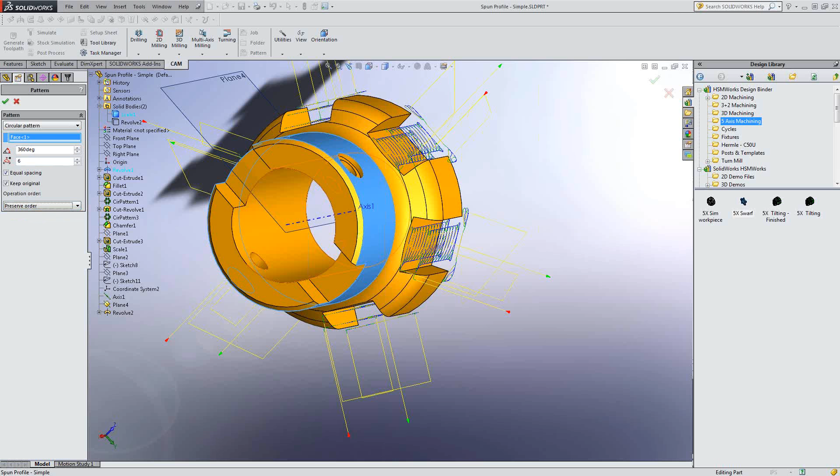Now in doing this, I can either say preserve order, order by operation, or order by tool. Those would come into play if you're doing multiple operations with multiple different tools, but in this case we're just doing one.

And there's that. Now I can do the same 3D milling adaptive, pick that as my machining boundary, clear that selection, and now pick this face as my tool orientation. I also want to select this face so I can get both of those at the same time. Click OK, and there it is.

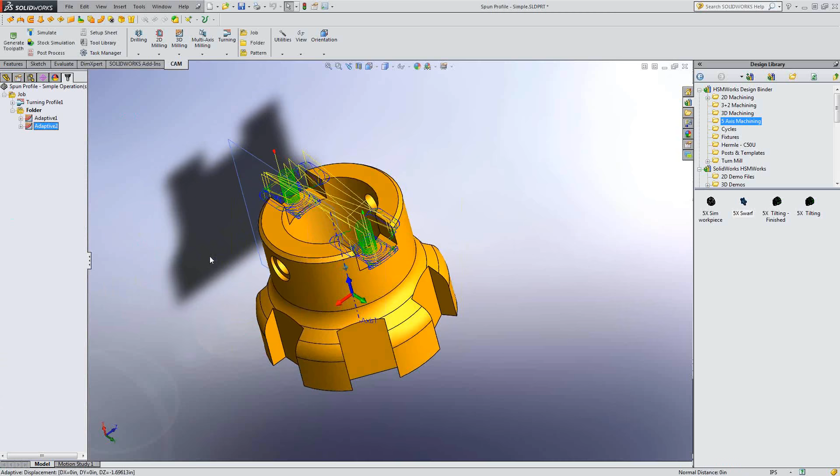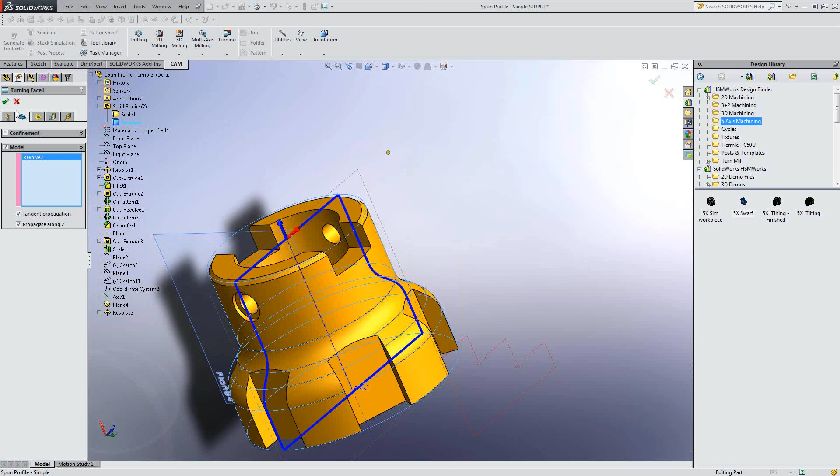Now the one thing I noticed is at the very beginning I didn't do a turn face operation, so let's say I need to go back and do that real quick. I'm just going to do a turn face. Again, here I'm going to select my model as that just to make sure it does it right. Go into my tool library, pick my tool, click OK, and it's there.

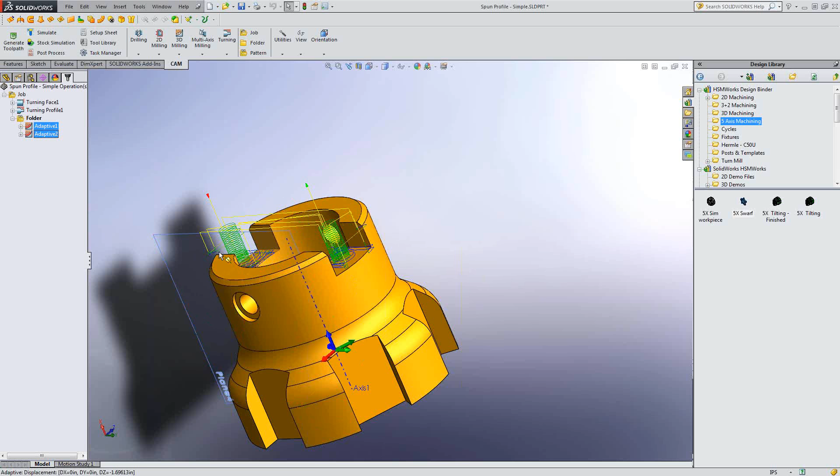All right, so that sums up the actual programming part of it.

Now let's go back and look at this option again. What I want to do is delete that one. Now it's going to have to update all these, so now it's finding just the two parts again.

And I want to go in and post-process this job. So let's say I'm just going to use generic Haas post.

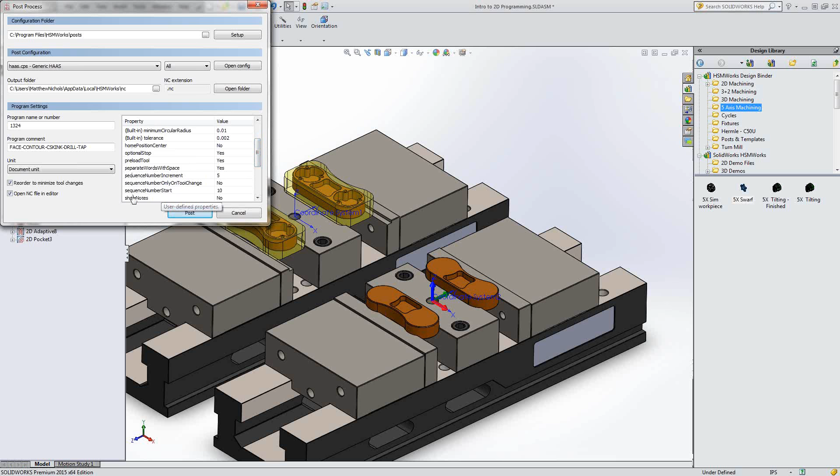What you'll notice in here is there's a lot of different pre-built-in properties that you can change. For instance, you can turn on and off homing at the end of the job, preloading tools, your G187 for your look-aheads, G0, G28. If you use subroutines, you can turn that on here. And then these are options that are built in, and ones that are programmed in your post-processor.

So I'm going to go ahead and post with that one, and this is what will come out for your Haas post.

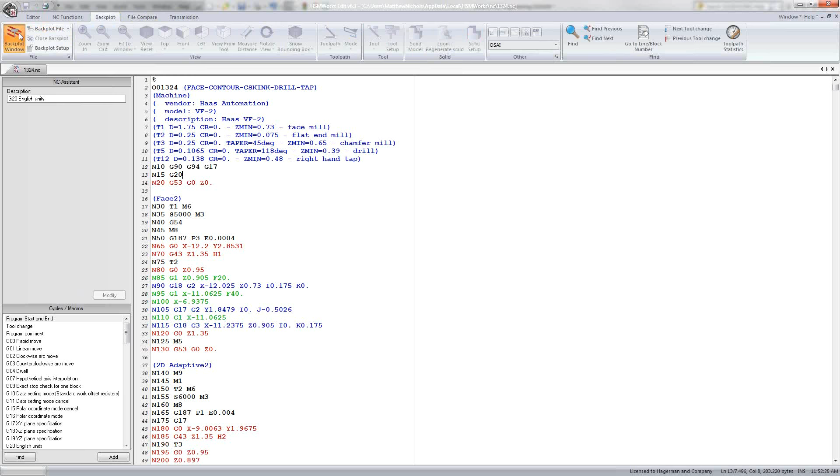Now, I believe that this NC editor is one of the best ones out there for just being able to visually see how your toolpath is going to react through the code in your machine.

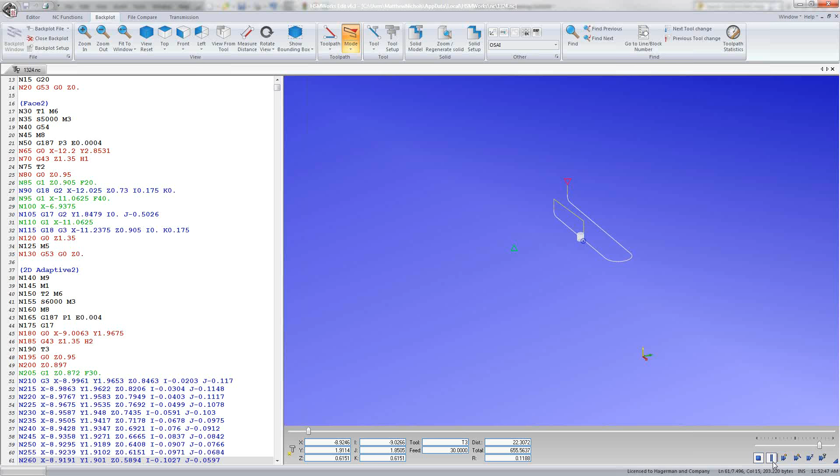So what this one does is I can simulate these line codes, and if you'll notice in the left browser, it follows along with it. So if I wanted to, I could pause it here and make a change to that somewhere in that line, and then I can just keep going and it'll just change.

And then all I'd have to do, if I made that change, is go up here and hit save, and I'm good to go.

Some other things you're able to do in here: this is also the point that, if you had multiple work offsets, you could define the distances between them.

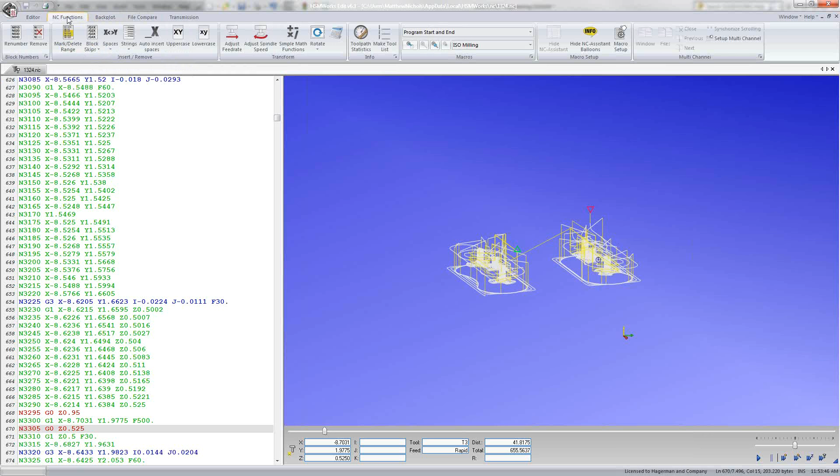I can send my NC file from here to a machine through the DNC. I can even compare files. So if I had a file at a machine and I had to make a modification to it, I can send it back here and compare what I originally posted with what was changed on the machine through the file compare. And then there are other basic NC functions and modifications that you can do.

So that concludes my aspect of this web event. Back to you, Ted.

Matthew, thank you. And now I'm getting feedback. I hope nobody else is. Thanks again, Matthew, it was very detailed. These one-hour presentations, it's tough to cover everything, but Matthew did a wonderful job.